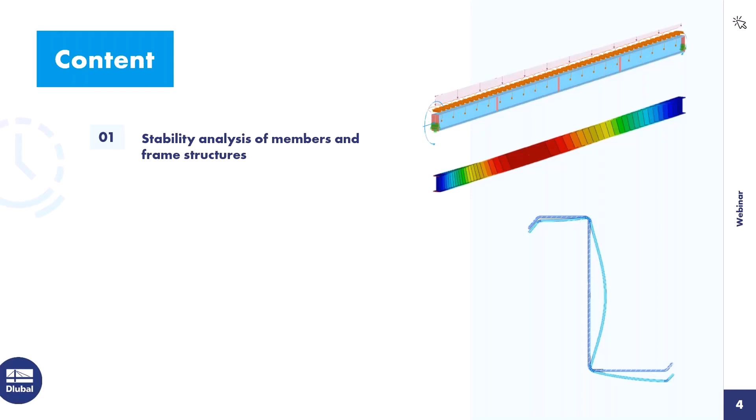Within this webinar, I want to show you the linear stability or bifurcation analysis that we can use in RFEM 6 as a tool to assess structural stability. I want to show you how to use this tool and where it is used internally in the background to assist the design of, for example, steel members. I would like to demonstrate this on some smaller example models that I have mostly prepared before. So we will jump into more or less finished models instead of focusing on the modeling of more complex structures. We will do that maybe next time again.

And the table of content looks like this. So first I want to focus on the stability analysis of members and frame structures. In the second step, I want to go to the stability analysis on a cross-section level using the finite strip method. Then I want to show you how the buckling analysis is integrated in the steel joints add-on. And lastly, I want to show you how we can use the add-on structure stability for troubleshooting of instabilities.

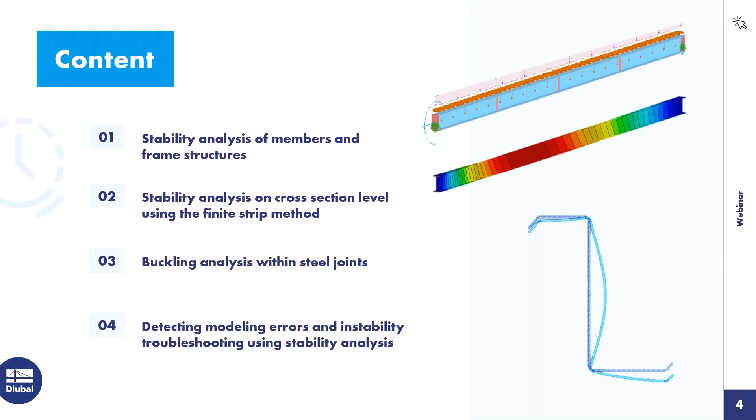I think Andreas missed the point of mentioning that we have a lot to discuss today. I have prepared a bit too much. I realized that when I did the first webinar on Tuesday. So it will roughly take me 90 minutes to go through this. I hope you have enough time. If you don't, then it's no problem. We will, of course, record the presentation, and you can watch the rest then on YouTube on our site. You will find the recording. All right, so apologies for that.

Okay, before we jump into the first model, I want to give you a brief introduction and explain at the very least a few points that are related to the stability analysis and how we perform it in RFEM 6. So what elements or structures are we taking care of with this analysis method? It's usually slender members and structures under compression that tend to become unstable, where the slenderness of a member or a structure is not only defined by its dimensions. The greater the length of a structure or member compared to the cross-sectional dimensions, of course, the more slender and prone to instabilities it is, but it's also related to material properties.

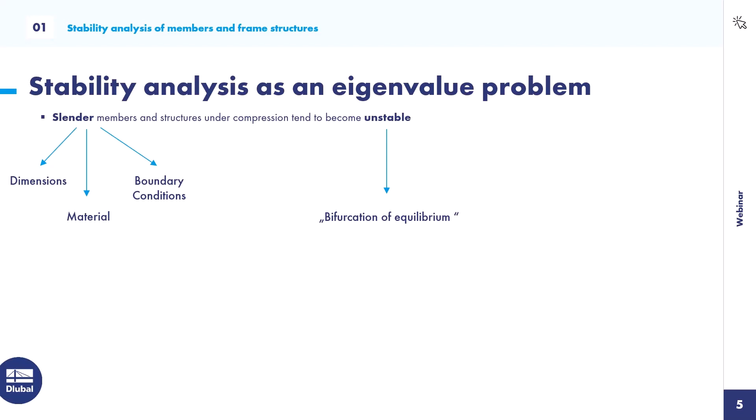So if I have a material that has high strength and low stiffness, then it's more likely that stability failure will be the critical design element as opposed to cross-sectional failure. And then lastly, the boundary conditions, of course, play a major role. If I have rotational restraints or lateral restraints for our member, it's not that likely to become unstable. And what do I mean with unstable? When we reach the unstable state, we have no clear state of equilibrium. We have instead a bifurcation of equilibrium. So there are multiple paths that the structure may follow. And that's why this linear stability analysis is often referred to as a linear bifurcation analysis, or LBA. I might use that abbreviation along this webinar as well. And also the critical load may sometimes be named bifurcation load.

Using the FEM, the ideal bifurcation load can be determined by solving a conventional eigenvalue problem. So we can set that up and solve that. What does ideal mean in that context? It means for the stability analysis that we treat the structure as linear, assuming fully linear structural behavior and a perfect geometry. So the base geometry of our model is used in this stability analysis.

The eigenvalue problem in the general formulation has two symmetric matrices, A and B, the eigenvalues lambda, and the respective eigenvectors x. To solve for the unknown eigenvalues lambda, we set the first term of our formula to 0, which is mostly done by calculating the determinant of this first part in the bracket and setting it to 0. We have multiple numerical tools or solvers to do that.

In our specific case, in the stability analysis, our two symmetric matrices are represented by the linear stiffness matrix and the geometric stiffness matrix. The geometric stiffness matrix is dependent on the loading conditions. That's also why, before we can solve a stability analysis, we need to perform a structural analysis to determine the internal forces in the system and to determine the entries in the geometric stiffness matrix.

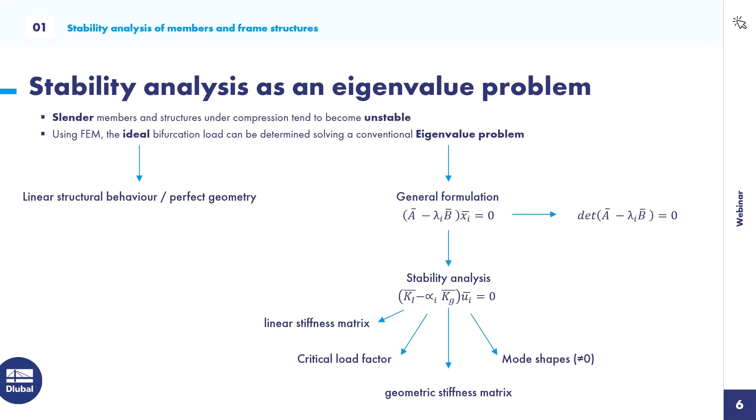I'll try to simulate an Euler case 2 and make a small comparison to see if we can evaluate the correct critical load according to Euler, and what else we can get from this structural stability analysis.

So let's jump into the program. As I said, I have prepared some smaller models for you. The first one is this simple Euler case. I have an HEB 300 beam with a length of 5 meters, and I applied a unit load of 1 kilonewton that sets the member under compression.

In order to perform a stability analysis with our add-on structural stability, I need to first activate it, which I can find in the base data of the model. I activate the respective add-on here, which you can find under analysis add-ons, and click OK.

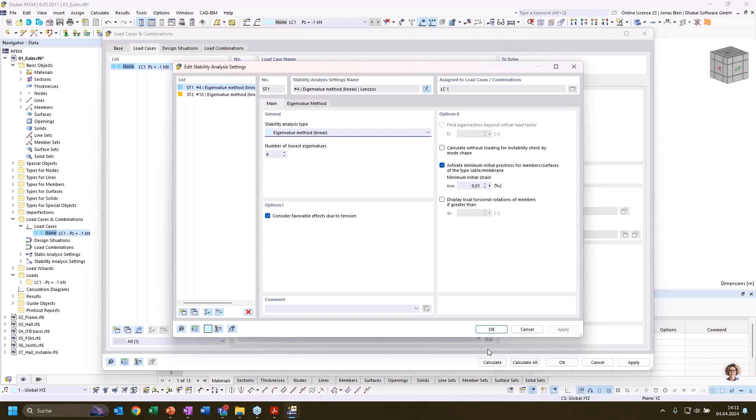4 eigenvalues are enough for our simple case, so I keep this number set here. Then we have multiple solver variants to solve the determinant of our eigenvalue problem, but the default solver should mostly suit us for this problem. There might be cases where you have subsystems that are not connected to each other. Then this default solver will throw an error and suggest another solver variant.

With these default settings, I can just run the load case. Now the first thing the program does is solve the static analysis, and then it solves for the stability analysis. When I have performed the stability analysis, I not only get the results for the static analysis, but I can also switch to the stability analysis results using this drop-down menu here.

Okay, so what do we see here? First of all, we get a drop-down menu in the upper left corner, and in the table we can see that we have these 4 mode shapes calculated with a respective critical load factor. This represents the factor which I can multiply the external load with until my system would collapse due to instability. So if I would increase the unit load of 1 kilonewton up to 7,035 kilonewton and run a second order analysis, my system would become unstable and I would get an error message.

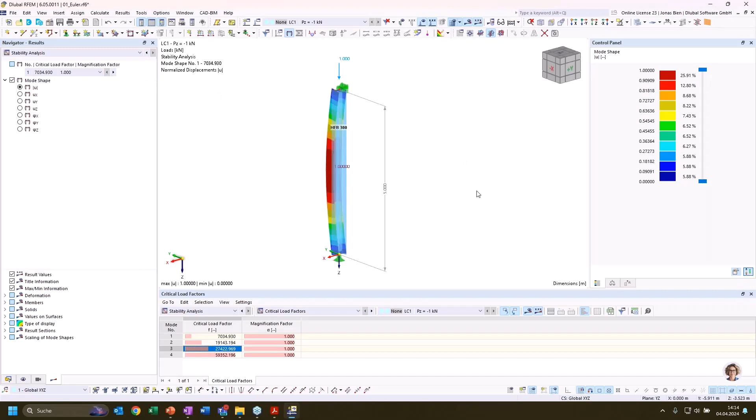So just that you are not confused when you see this parameter in another context. We can go through the 4 eigen modes here by clicking the table entries, or through the drop-down menu. We can see the first eigen mode that is presented to us would resemble buckling of our I-beam around its weak axis, and it's doing that in a symmetric way. We have a simply supported beam here, so that looks as expected. Then the second mode shape would be buckling around the strong axis.

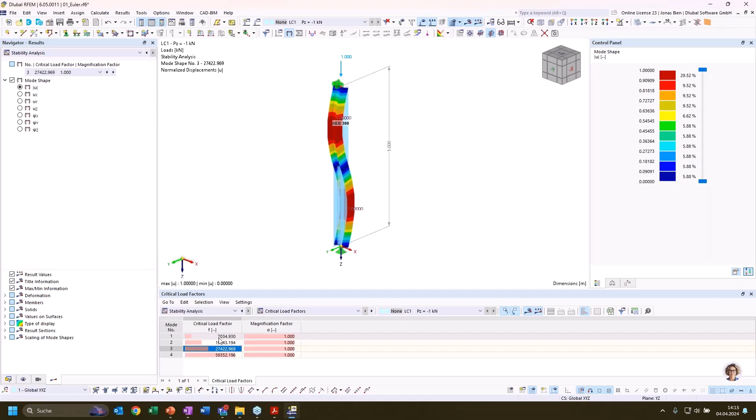The third and fourth eigen modes are some multi-wave eigenmodes for buckling around the weak axis. These are mostly not very interesting for us, so usually only the mode shape with the lowest critical load factor is of interest for us. And I want to now compare the critical load factor that we have calculated here with the critical ideal Euler load that we have for our Euler case 2.

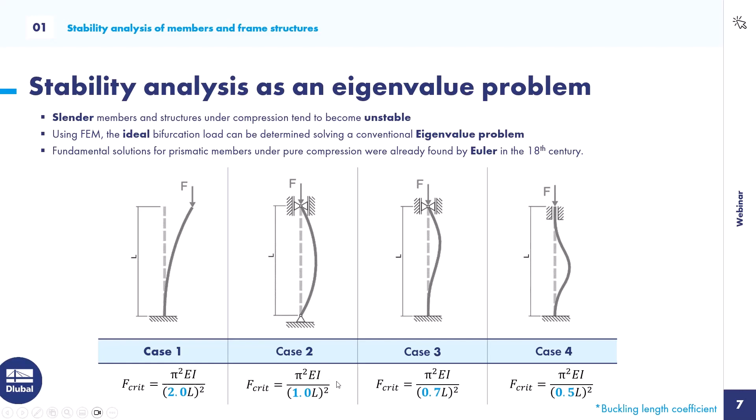Just so that you remember, we could calculate it using this formula: pi to the power of 2 times the Young's modulus times the moment of inertia of our section, divided by the effective buckling length. In this case, it would be the length of our member times 1, to the power of 2. I could do that using my calculator, but then I would need to look up all the values for my section, the member length, the material properties, and so on. So I want to show you an alternative solution.

We can use the in-app console that we can open via the toolbar. In here, I can reference all the objects that I have in my model. For example, I could reference my material number 1 by typing this and then a dot, and I see all the properties that I can ask this object for. For example, I would find the elastic modulus here, and if I press enter, I get the elastic modulus of our material number 1 in SI units.

That's important, and of course I can do some more complex calculations here. I could take this elastic modulus, multiply it with the moment of inertia of my first section. Let's see first what the critical Euler load would be for buckling about the weak axis. That's what mode shape 1 gives us. So I use the moment of inertia for the z-axis here in that expression.

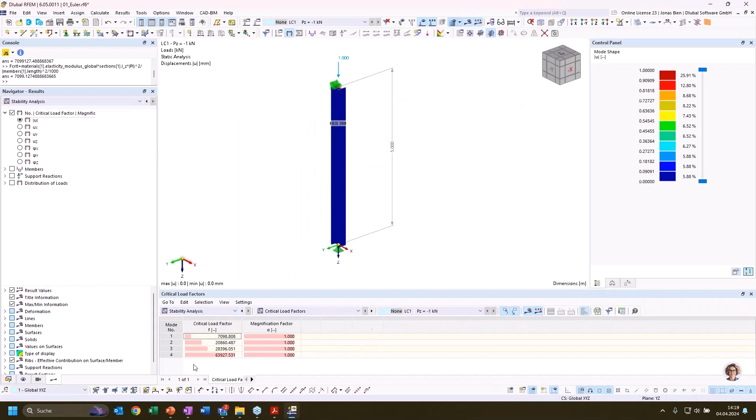So if we want to compare values, we can manually deactivate the shear stiffness for our section in RFEM and do the calculation again, and see what our critical load factor would now be. If I again go to the results, we now see that our critical load factor is much closer to the ideal Euler load.

It compares very, very well.

So we could, of course, also calculate the critical load for buckling around the strong axis. Just we need to swap the Z with a Y value, and we have the moment of inertia about the strong axis, and also this value is quite satisfying if we look with regards to our result that we received from the structural stability add-on. So that compares quite well.

We've, as we expected, met the results of the analytical formula. Okay, now that that's set and we are confident that our solution here provides reasonable values, I want to show you another important result of our stability analysis when it comes to member results.

And we can, because it's often used for the later design of the column, if we, for example, would take a classic approach to design this steel column using an equivalent member method, we would need effective buckling length. And we can use the structural stability add-on to calculate the effective buckling length for this equivalent member method.

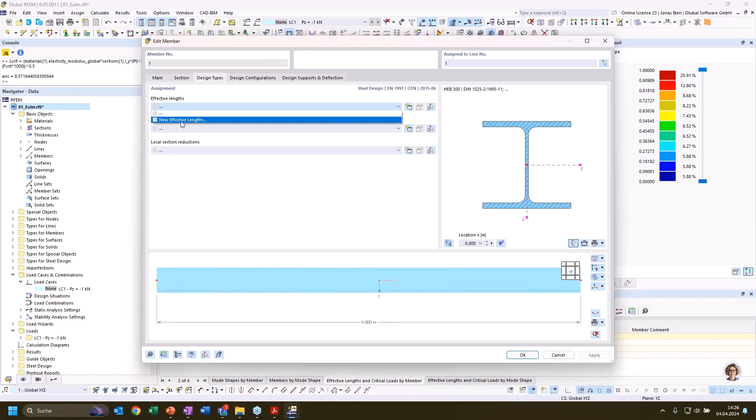One thing I want to show: we can directly import these buckling lengths into our design add-on. So if I want to design this column here with our steel design add-on using the equivalent member method, I have to assign these effective lengths.

Here I have the option to import the buckling length from the stability analysis. If I click this, we get another tab where I can enter the load case, the mode shape, and the member number. Now it would take this buckling length coefficient from mode number 1 for beam number 1 and evaluate the effective buckling factor to use for the design.

In this case, we have to take care that buckling around the strong axis happens in mode number 2, so it is observed in mode shape number 2. So we would need to enter mode shape number 2 here, and mode shape number 1 would be for the buckling length coefficient for buckling around the weak axis. That would fit and suit our expectations.

Of course, we can do that for more complex systems as well. We just need to keep in mind that when we have a more complex system and change something, the order of the mode shapes can also change. They are always sorted for the lowest eigenvalue or lowest critical load factor, so the mode shape with the lowest critical load factor is always mode number 1.

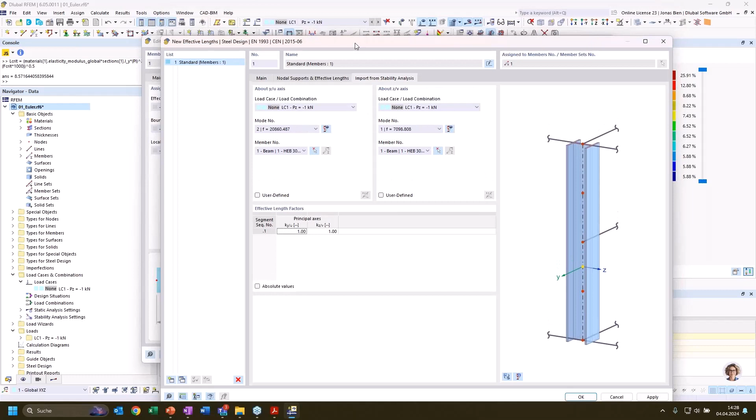If we change something in our system, it can happen that this sorting changes, but these entries then need to be checked again because they are not smart enough to adapt to the changed model. So we would do that manually. Sometimes it's just better to do the stability analysis and then manually put in the buckling length coefficients, so we don't need to make any thoughts about it anymore.

All right, but that's not what I want to focus on now. I want to show you instead how the buckling length coefficients adapt when I adjust the statical system. So when I, for example, take a rigid boundary condition at the member at the bottom of this column, it should calculate a lower buckling length coefficient because now the system resembles Euler case number 3.

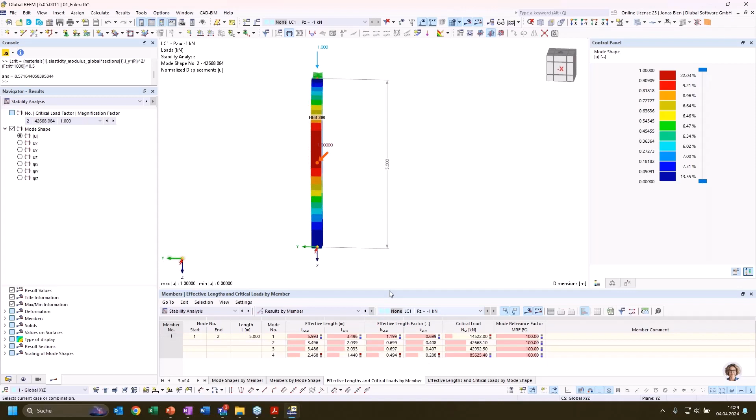We know that here we would expect a buckling length coefficient of 0.7. And that's exactly what we get for the first mode shape for the weak axis and the second mode shape for the strong axis in this case.

We also need to take into consideration that for these cases, why should I use my add-on here? Because these cases are known, I can just apply the Euler formula and calculate my buckling length. But what if we have something like a spring stiffness, a certain stiffness somewhere between Euler case number 2 and Euler case number 3?

Here it's not so obvious what the buckling length for our equivalent member check would be. Of course, we could look into textbooks that have these cases covered, but we can also use the structural stability analysis to evaluate the effective buckling length factor here. As we expected, it is between 1 and 0.7.

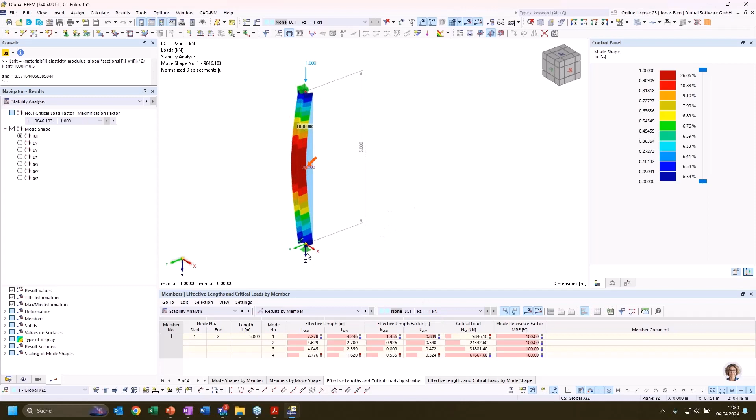So everything's set. Because it's a linear analysis, it is interesting what the program does with nonlinearities. So, for example, if I apply some kind of nonlinear boundary conditions here, which at first glance don't look that nonlinear...

In this case I want to apply a stiffness diagram where I have the stiffness of our spring at the column bottom in relation to the vertical load, but as you can see, it should be constant—no matter what the vertical load in the column is, the spring constant should always be constant. So it doesn't look nonlinear at first glance, but we have to take into consideration that all these nonlinearities are ignored in the structural stability analysis. I want to just demonstrate this.

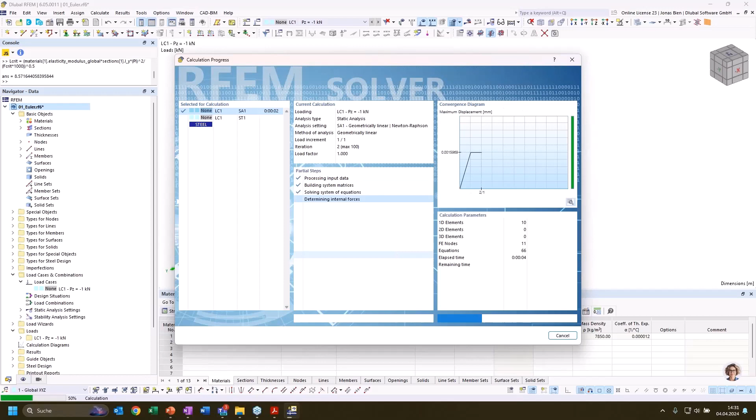So although we have set this nonlinear spring stiffness at the bottom, as a result we get Euler case 2, where a pure hinge is assumed at the bottom. So when it comes to the supports, only these entries are taken into consideration for the structural stability analysis.

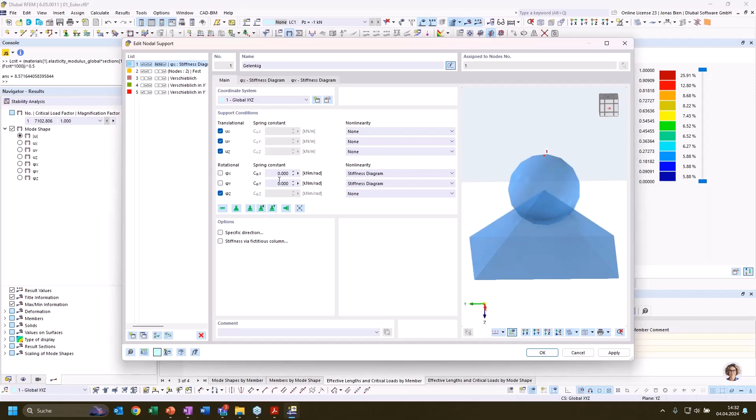Of course, when we are working with other nonlinear elements such as tension rods or buckling members, these are taken into consideration or not according to their state in the static analysis. So if we have a tension member that is under tension, it will be taken into consideration in the structural stability analysis as well, and vice versa.

Okay, then one last thing to finish this simple example here: let's delete this nonlinearity and see what happens if we divide this member in half.

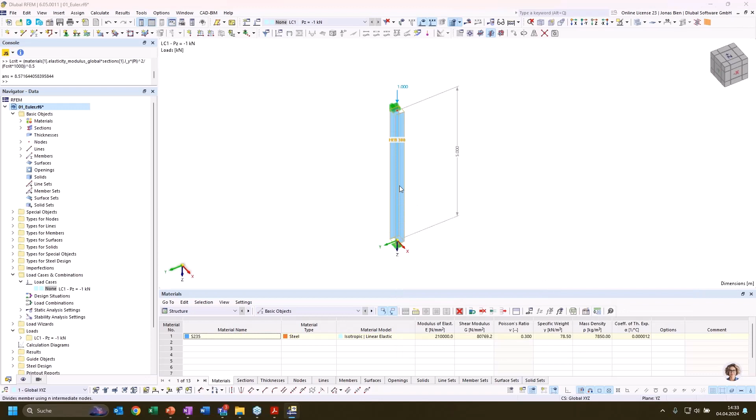I just introduce an intermediate node and divide this one column into two separate members, and again run the structural stability analysis.

What does it do with the buckling length? Is it still valid, or does it give me some weird results? Let's see. The critical load factor is still the one, or is the same as if we wouldn't have divided this column.

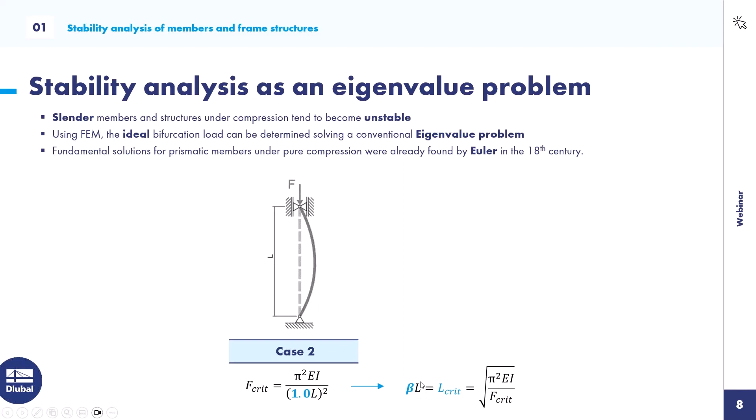And now the buckling length, or to dock it again, the effective length of our members is also the same. So now we have two members, but the effective length for each member is still 5 meters, and that's what is expected when we again look at the formula for the calculation of our critical buckling length, because the Young's modulus, or the moment of inertia, they have not changed, and also the critical load factor has not changed. The only thing that changed is our reference length L for the member. It's divided into half, and that is then only visible in the buckling length coefficient, which is now 2 instead of 1 for each of the members.

So we could still use this effective length factor for the stability design within steel design, or some design add-on. It would still be valid.

Okay, now let's jump into, or increase the complexity a bit. So what if we have more than one member in our model?

In this case, we have a 2D model of a 2-hinged frame with an additional column number 5, that is just connected to this 2-hinged frame by a truss member. This is basically a simply supported column, just as we have seen it before, which leans toward this 2-hinged frame here, or is supported by the 2-hinged frame at the column head. All 3 columns, so member number 1, 3, and 5, are loaded with a load of 1000 kilonewton in compression.

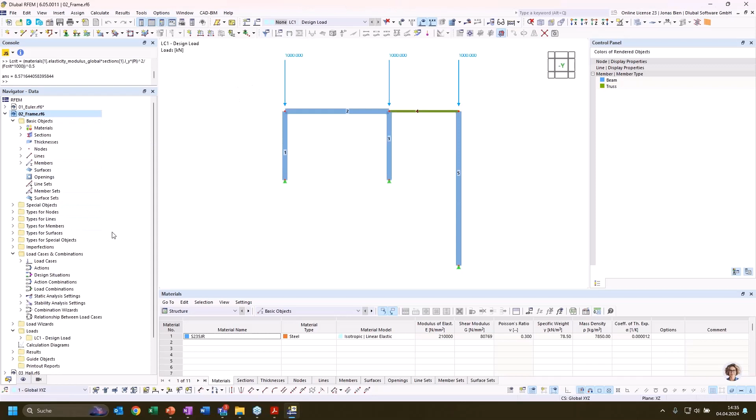And now let's perform a stability analysis for this load case as well. It should be all set for this analysis, so same settings as we have used them before for the Euler case. And accordingly, we also get 4 mode shapes for our structure.

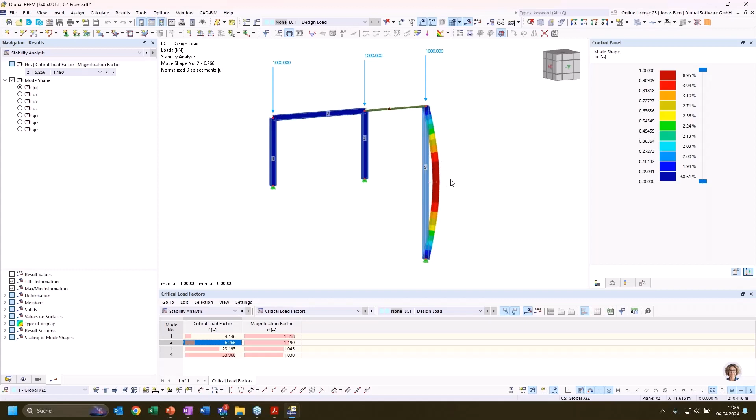I want to quickly browse through these mode shapes together with you. So the first one is some asymmetric lateral deformation of the 2-hinged frame, and also this connected pinned column is also moving with the 2-hinged frame. Then the second mode shape would represent buckling of the longer column with the pin supports around the strong axis. The rest of the structure does not seem to have any deformation.

And the third would also be a higher mode of this pinned member number 5. And mode shape number 4 would resemble a symmetric buckling mode of the 2-hinged frames without any participation of the simply supported column here at the side.

So if we want to now extract the effective length, for example, for the columns here of the 2-hinged frame, we can again go to the member results of the stability analysis and check the effective length by member, and I can then click on one of those members, and I will automatically be routed to the respective table entries.

And now in the first mode shape, as we have seen, this 2-hinged frame suffers from buckling around the strong axis, and we could read the effective length factor accordingly for the strong axis in this column right here. So we would get an effective buckling factor of 2.8, which is also in the realm of the expected results for such 2-hinged frames.

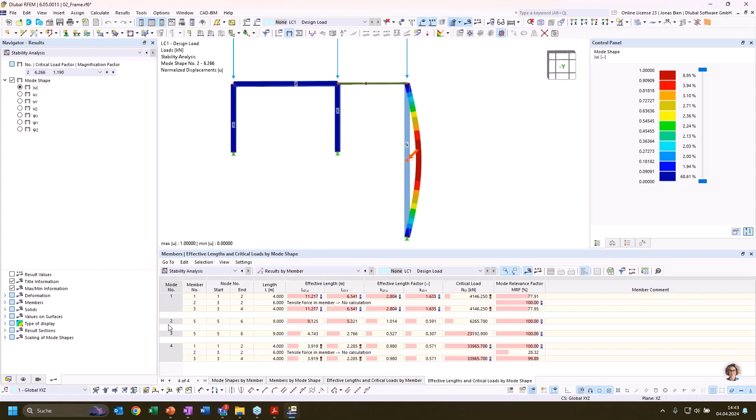We can, of course, also use the filter function to make our lives a bit easier when browsing through this. For example, we could say we are only interested in members that have a mode relevance factor greater than 20%. And if we do so and go through the mode shapes, for mode number 2 we have only one entry, which should be a localized stability phenomenon and not so much related to a structural failure of the whole structure or substructure of the model.

That way we can use the mode relevance factor to somehow filter mode shapes for our purpose, for example, for the determination of effective length factors.

Because here I would go the other way around. When I'm interested in the relevant buckling factor for column number 1, I would go through the modes I have calculated and only take into consideration the mode shapes that have a mode relevance factor that is significant, and read my buckling length factor from the mode that has the lowest critical load factor. In that case, I would definitely take the value of 2.8 for column number 1 and also for column number 3.

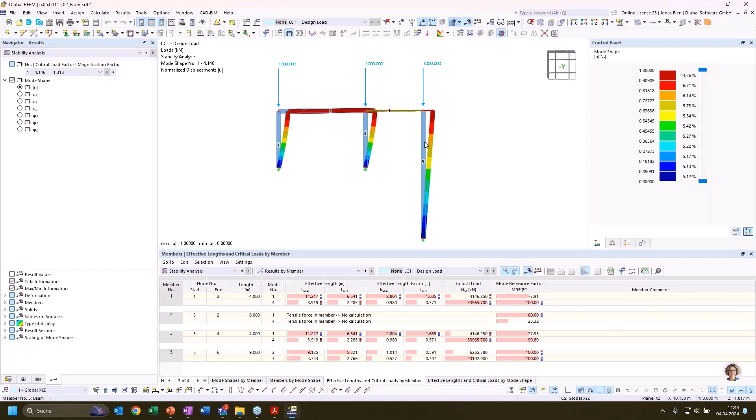All right, but I want to show you in the next step how we could also leverage this tool in a more realistic setting, or how to approach the buckling length determination in a more realistic model.

So here we have an industrial hall. We have a lot of different load cases here that, of course, would give us some, I don't know, probably about 100 or 200 load combinations. Of course, in some applications, we can have a lot more load combinations.

And then the question is which load combination, or the first question for our buckling length determination, is which load combination is most severe for buckling for a specific member.

I have now, for this case, deliberately started with result combinations, because sometimes, for example, when I want to design bridges, I may have 10,000 load combinations, and it's not possible to calculate all 10,000 load combinations and assess them for stability. So what I would recommend, if you have too many result combinations to handle in one model, of course here it would still be feasible and no problem, but if you have additional load cases, that can be a problem.

I would, in the first step, calculate my combinations with result combinations to get the envelope of results. I need to calculate the design situation where the complete envelope of all result combinations is given. Then, for example, when I want to design the columns for buckling, I would look into the internal forces in this envelope solution and look for the most critical ones for buckling, which of course would be the combinations that give the highest compressive load in the columns.

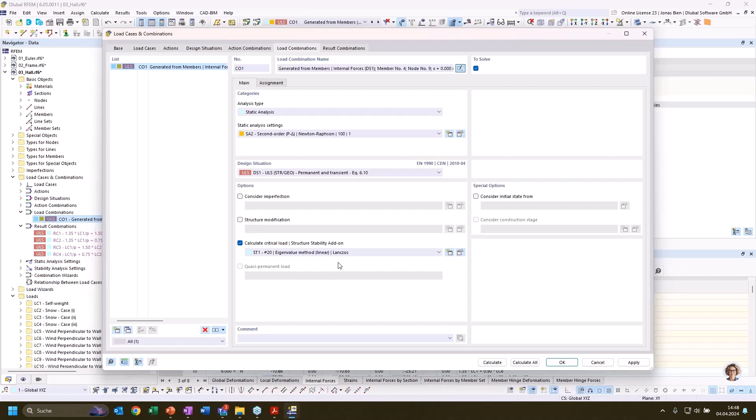Now from the result combination, I can just by right-clicking this combination, generate a load combination just from this table. For this load combination, where I have the feeling it could be the most relevant for buckling of our columns, I can now perform an eigenvalue analysis, a linear stability analysis, by just activating it here and calculating it. So now I specifically run the stability analysis for just this one load combination that I've generated from the envelope.

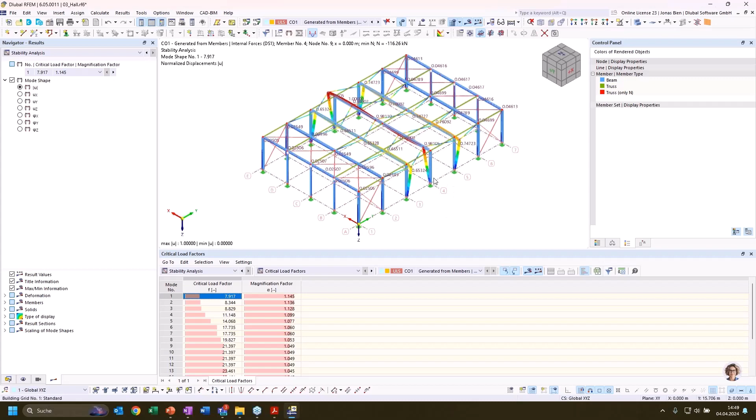Now the second question, after sorting which design situation could be relevant, I would have to figure out, for this column, which mode shape is the most relevant for determining my buckling length. So again, as before, I have 20 critical load factors and mode shapes, and I can browse through them. I see some involve deformation or buckling of the frame where this column is involved. Some are only isolated buckling of those columns, or some compressive member in the roof, so these wouldn't really interest me. In order to filter these out, I can again use the mode relevance factor.

So I just go to the table effective lengths and critical loads by member, click on my member number 4, and get the whole table here. I get the mode relevance factor for all 20 mode shapes I've calculated, and I see that only in 2 of these mode shapes is my column member really participating. So these would be the only 2 mode shapes suitable for extracting the buckling length.

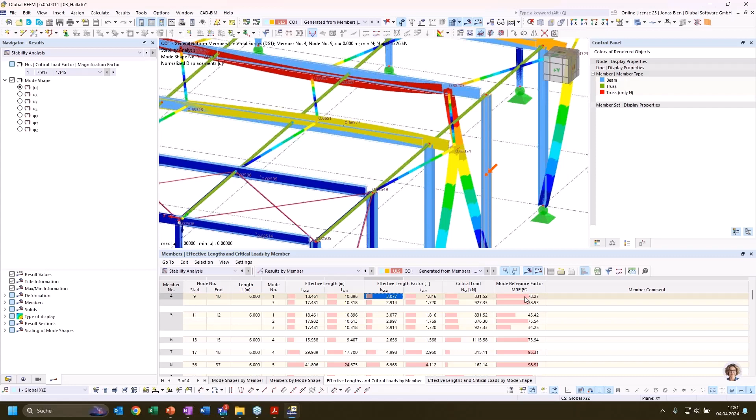I could of course apply the filter to make it more accessible. Then I would again follow the rule from the last smaller example: take the mode that has the lowest critical load with a significant mode relevance factor, and take the effective length factor for buckling around the strong axis from this mode shape. So this is how the mode relevance factor can help you assess the relevant mode shapes for a particular member design.

Yeah, that's what I wanted to show you on this model. Now I want to take the next step and highlight something you may have noticed so far. We have only discussed the flexural buckling of members, but especially in steel structures, other stability modes can also govern the stability design, namely torsional buckling or lateral torsional buckling. We can also investigate those stability modes with our structural stability add-on, but we need to activate warping torsion in order to detect those stability modes.

I want to make another small example where we investigate the lateral torsional buckling of a simple system, where again, as in the first Euler case, we know the exact solution. I want in the first step to compare the values we get from RFEM with the analytical value. So in order to perform a structural stability analysis where we can also consider lateral torsional buckling, we would, in addition to the structural stability add-on, also require the torsional warping add-on.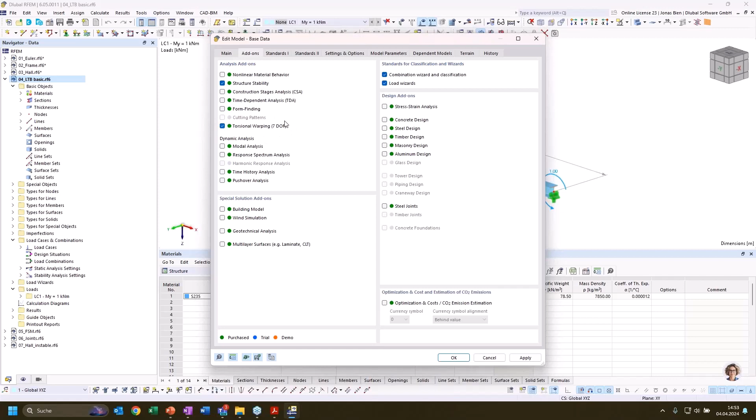And as soon as we activate the 7th degree of freedom, this would be directly included in the stability analysis, or would be taken into account. And I have now for this simply supported member here, it's an HEB 300 again, with a length of 10 meters and a constant bending moment.

I could again run the stability analysis, and now we are not only getting modes for flexural buckling, or we wouldn't get any flexural buckling modes for this member at all because we have no compression in it, but I didn't activate the structural stability analysis for this particular load case, so I will just do that. And now we should get a lateral torsional buckling mode.

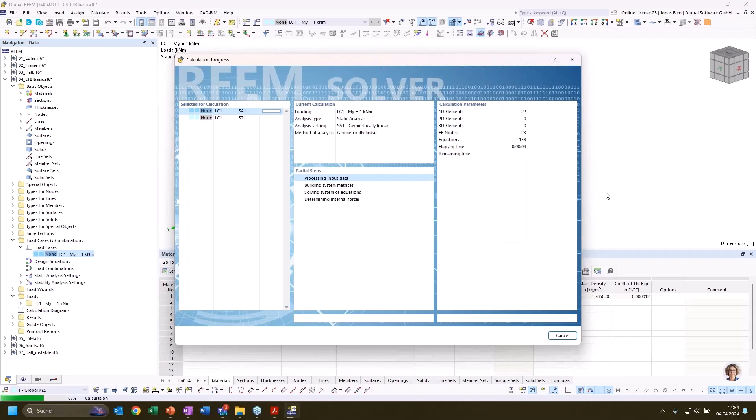When we switch to the results of the stability analysis, we can now see very clearly this characteristic deformation of our member. It tilts and at the same time moves in the direction of the weak axis. And again, we get a critical load factor, and this one we can compare with the analytical solution. For this simple system, an analytical solution can be easily found in the textbooks. It was once also implemented or written down in some of the codes.

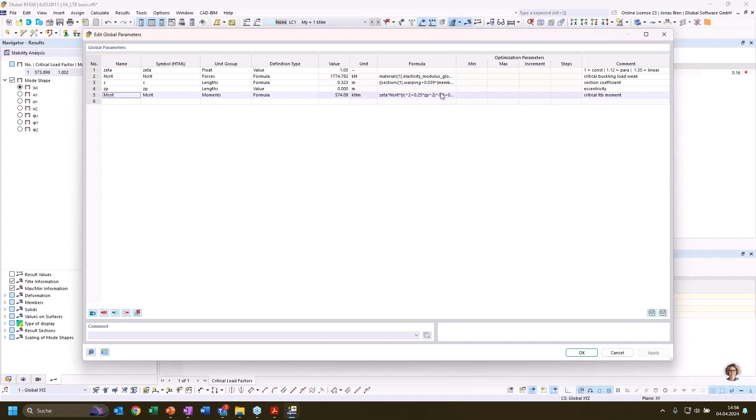For example, in the old German steel construction norm or code DIN 18800. I think in some national annexes of the Eurocode 3, this formula is also given. But for our convenience, I already plugged this formula to calculate the critical bending moment for lateral torsional buckling into our global parameters. So that's another thing I can do instead of just using the console and typing in my commands to evaluate certain parameters or values. I can also use global formulas, global parameters, to calculate something. For example, I have now created a formula for the evaluation of mcrit, and we can look at what goes into it. Maybe this looks somehow familiar to you.

So here we have a value or a parameter that describes the moment distribution, which is zeta. It's 1 in this case for this simple case with uniform bending. Then we have the elastic buckling load, ncrit. That's the one that we already assessed in the first example. Then we have some parameter C that takes into account the warping and torsional stiffness of our section. And we have the ZP, which resembles the eccentricity of the loading, which is in this case not important. And what we get from this formula is a critical bending moment of 574 kilonewton meter.

We could also use the console again to evaluate this. So all the global parameters that we have stored, we can call them here in our console. And in this case, it's again written in SI units, so I would need to divide it by 1000 to get to kilonewton meter. And this is very close to the value that we evaluated here with the structure stability add-on. So it works again quite well.

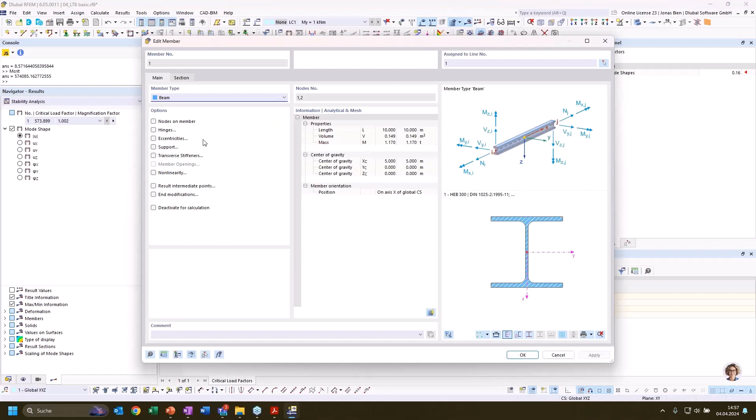But of course, as in the Euler case, we can use our structure stability add-on to investigate much more complex cases. For example, we could add member support. So I go to the member and add a support, and then I get this tab here where I can enter a member support. I could manually put in some rotational restraint. I could even apply an eccentricity of this member restraint. For example, I could say I have a rotational restraint at the top of the flange.

And we can now also in the global analysis take into consideration shear panels and rotational restraints. So these are entered as fictitious stiffness. And you may know them from steel design or aluminium design or timber design, where you always had access to those restraints, and they were only considered in the design of the member, so in the design add-on. But we can now use them in the global structural stability analysis as well.

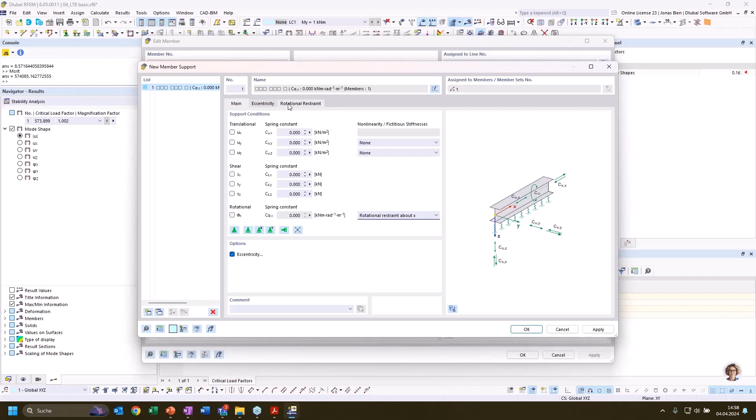So I could, for example, define a rotational restraint. For example, I want to consider some kind of sheeting that I have on top of my girder. I will now just take some random settings, more or less. I take some sheeting just to get some stiffness. Of course, these values were accessible all the time, but now we can, as I said, also leverage the stiffness that we define here in this global structural analysis. And one thing that is also new, and I want to highlight to you, is that for the spring stiffness of the connection between the trapezoidal sheeting and our member, and also for the load introduced to the sheeting, we can now set load dependent values.

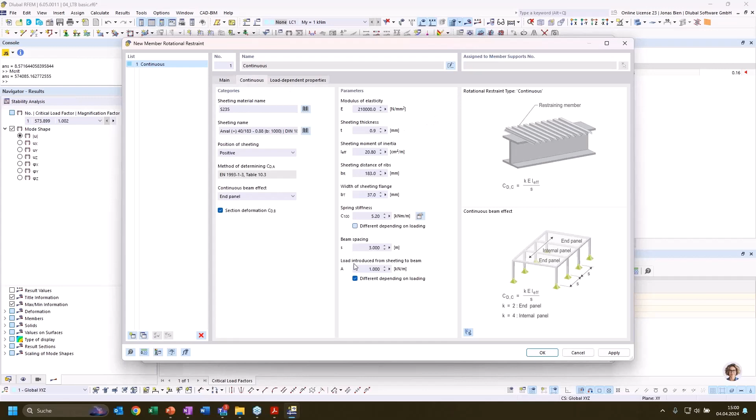If we click these options, we could, if we had multiple load combinations to investigate, set different values for different load combinations, for example, distinguishing between situations where we have suction on the roof and compression or pressure on the trapezoidal sheeting. We could take this into account by adding different values in the table. This is also quite new, since a few months.

With this rotational restraint, I could also add a shear panel. By the way, we are now able to not only add a shear panel in the Y direction, but also in the Z direction, which could be interesting for columns that are also girders rotated by 90 degrees. We can use that now since some weeks.

We have now calculated directly some stiffness for the rotational restraint from our trapezoidal sheeting, and we could consider this in the stability analysis to take it into account. By default, these fictitious stiffnesses, the trapezoidal sheeting in this case, would only be accounted for in the design add-on.

If we activate the steel design add-on, in this case because we have a steel girder, and I now activate the lateral torsional buckling check according to the equivalent member method, we see the default way of calculating the critical moment value is using the eigenvalue method, the same method we use in the structural stability add-on. Of course we need to set some boundary conditions for the design add-on, but in our case it's simple: we have simple support with fork supports, and that's what the default settings are also for the effective length settings. So that should be all right.

In order to perform the steel design, we also need a design situation and a load combination inside this design situation. I will just add a load combination with 1 times the first load case. And if we now do the calculation, we're running a static analysis, then the structural stability analysis of this member, and then the steel design analysis.

Let's check the results and compare them. First, in the stability analysis, it seems like nothing has changed. We still have a critical bending moment of 574 kilonewton meter. But in the design add-on, let's check the result here. We have now the check for lateral torsional buckling.

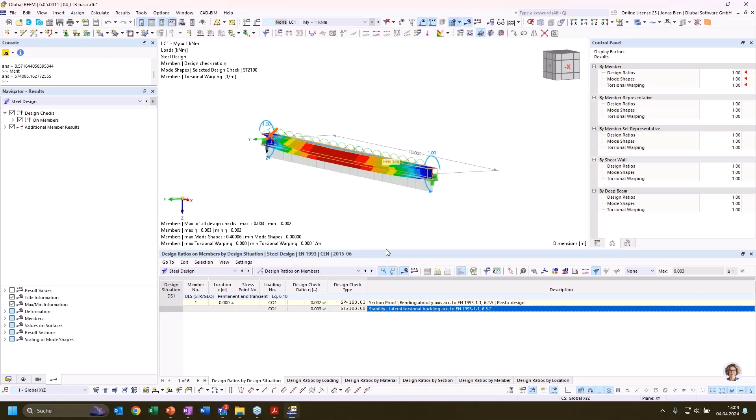We can also see what the relevant mode shape would look like if we click on design details. If we double click on the design details, we can check what value for mcrit is evaluated in the internal eigenvalue analysis. We see that now in the steel design add-on, the rotational restraint on top seems to already be taken into consideration, because we have a much higher critical moment there, while in the structural stability analysis the values stayed more or less the same.

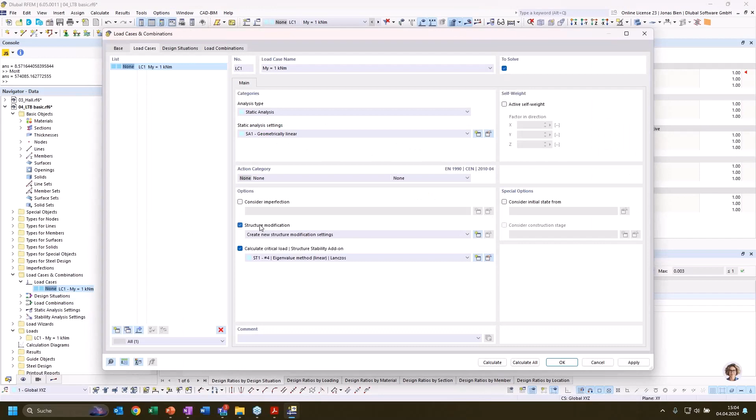But we now have the option to take these fixture stiffnesses into account also in the structural stability and static analysis, by adding a structure modification to this load case. Here we just need to activate the option to consider shear panels and rotational restraints also in static, stability, and modal analysis. Before, it was only possible to take these shear panels and rotational restraints into account in the design, in the LTB design within the design add-ons.

But now we also moved this possibility to the global analysis, because you may want to perform a lateral torsional check, like using a second order theory analysis with imperfections, and you may also want these rotational restraints to be effective in this global analysis. That's why we added this option through the structural modification.

What is also new is that you find these objects, the member shear panels and the rotational restraints, now under types for members and not anymore under the types for the design add-on. In earlier releases, we had those two objects under, for example, the types for steel design or aluminium design or timber design. Now you find them under general objects for types of members.

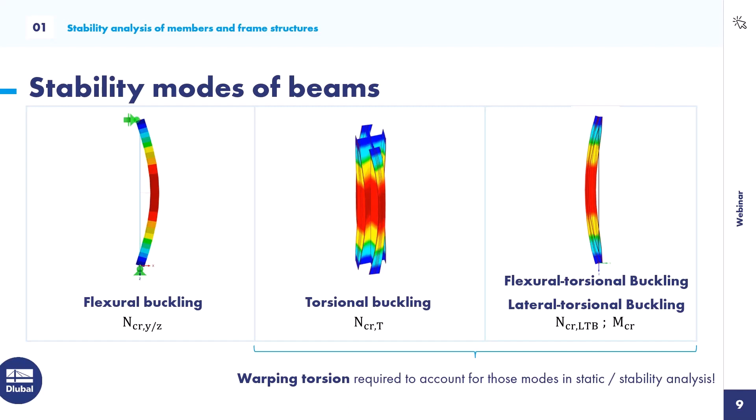If we're interested in local buckling of the cross section, we could extract from these beam models a shell model. That's quite easy in our software - you can just right click on a beam member and say you want to generate a surface model from it, and surfaces are directly generated with the correct thicknesses, just as they had for the member. For example, the top flange would already have a thickness of 19 millimeters corresponding to the HEB section. Then we could mesh this very finely to do stability analysis for this shell model.

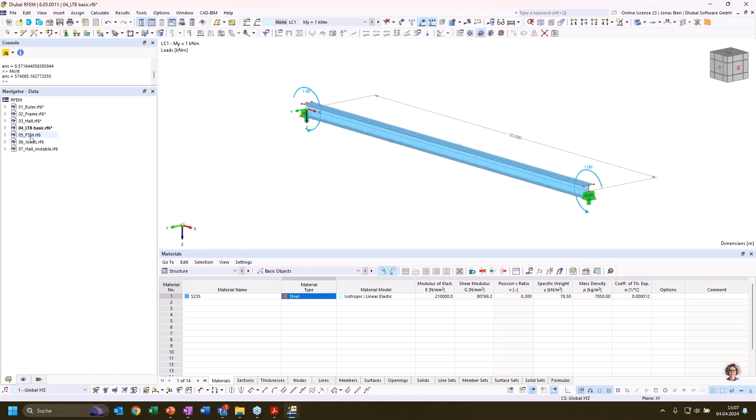By doing so, we could also analyze local buckling modes of the section. Since it's not very interesting to do this with a hot rolled section that isn't susceptible to those local failure modes, I want to do it with a cold formed thin walled section. So here I have prepared a fifth model with a parametric C section with a height of 200 millimeters, width of 75, and a wall thickness of 2 millimeters - a perfect example of a thin-walled, cold-formed section.

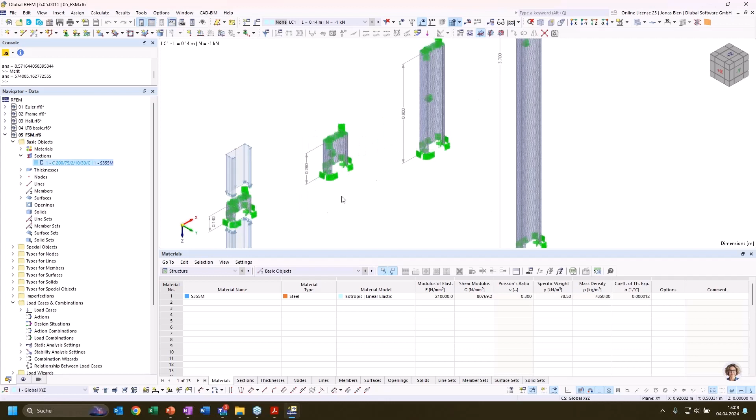As I just showed you, I transferred my beam model into a shell model and meshed it very finely to get all the relevant local buckling modes. Then I modeled 4 different members with different lengths: a very short element of this C section, one with double that length, one with a length of 90 centimeters, and a very long C member as a shell model.

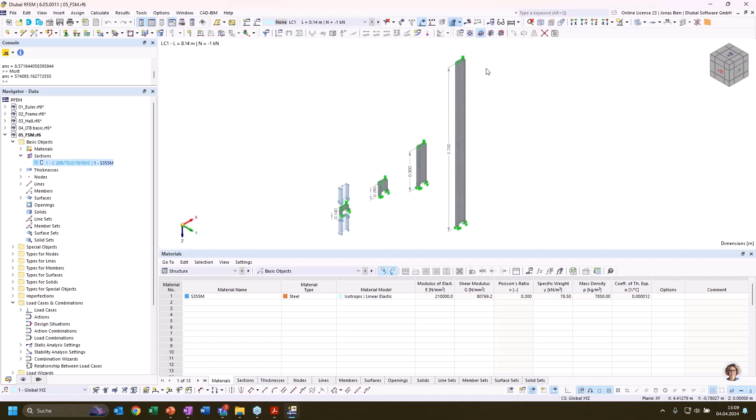I applied some boundary conditions to avoid any unwanted singularities in the model, then applied in 4 different load cases a unity load to the top and bottom of these column stubs. As in the first step, that should resemble the Euler case - a beam with a certain length with uniform pressure applied. But in this case I have a monosymmetric cross section which is very thin. Let's check out the results - what do we get from such a stability analysis?

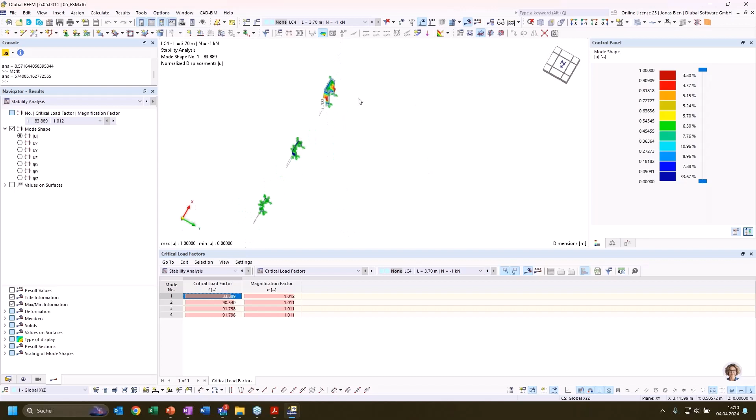Now I have performed a stability analysis of the shell model. If we look at the results for the longest segment, this 3.7 meter long C section, I have the first critical load factor at 84 kilonewtons, and the mode shape resembles flexural torsional buckling. So in this case I don't see local buckling of the different cross-sectional elements, but the whole section deforming at midspan.

If I check the second mode shape, I have buckling about the weak axis. The third mode shape involves local buckling of the web, and this we can only see with such a refined shell model.

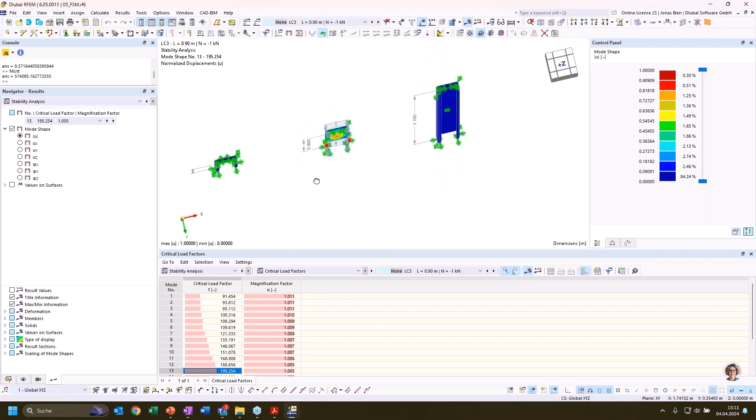Now what happens if we take a shorter column? We see that the critical load factor and mode shape are governed by local buckling. So in this case, global buckling like flexural torsional buckling or flexural buckling wouldn't be the major issue, but stability failure would be more related to local buckling of the web. I can go through this and find several mode shapes where especially the web buckles in different configurations, and then in mode shape number 13, I find a mode shape particularly interesting for cold-formed members, which is distortional buckling.

In this case, it's not separate elements of the cross-section deforming, but the whole cross-section bending, so to say. If we look at the midsection, the lips are deforming horizontally, and at the same time the web is also deforming. For the very short configurations, I again find local buckling modes. What's also important to note is that the critical load factor is not changing significantly - we're always around a factor of 90 when comparing the smaller column segments.

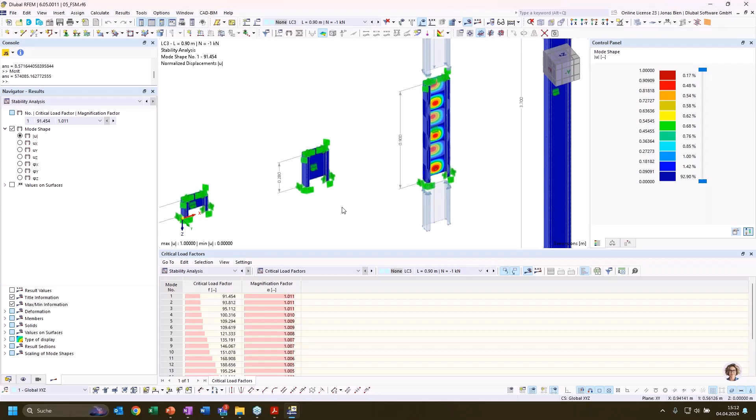But this type of analysis comes with a drawback - it's quite cumbersome to prepare this kind of model. We require quite a fine mesh to get valuable results, and calculation in this case would take 1 or 2 minutes for these 4 cases, because there are quite a lot of elements and degrees of freedom to solve.

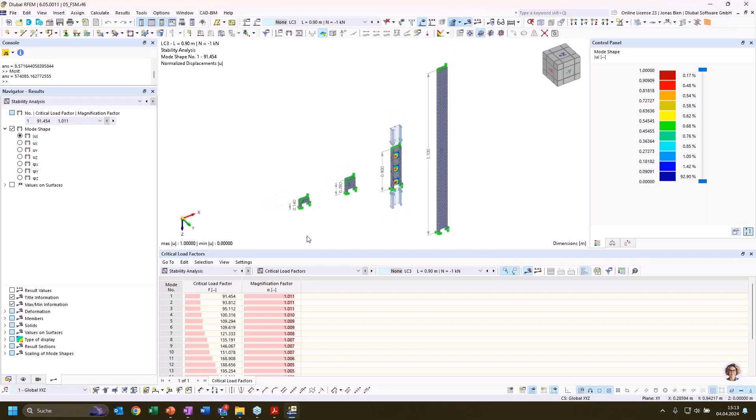But we have another alternative option to investigate such failure or local instability modes on the cross-section level, and this is kind of hidden in the edit sections dialog. That's why I want to show you that and highlight that we have this feature.

For a particular section, we have on the right side this preview of the section with all the dimensions. Below that, we have a drop-down menu where we can find a lot of interesting features and functions of this cross-section, for example unit stresses under certain loads.

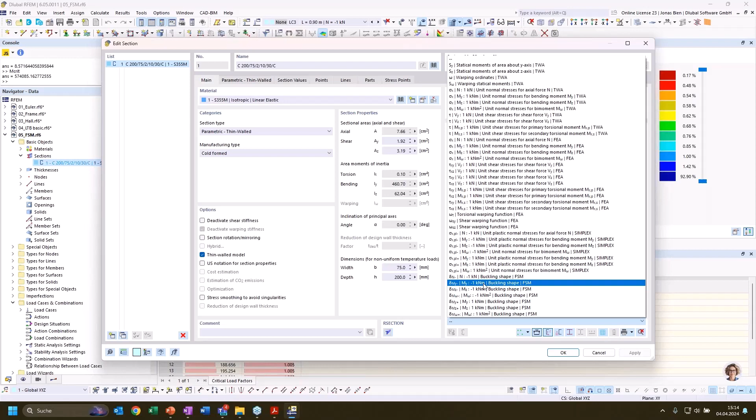But right at the bottom, we also have the possibility to investigate the buckling shape of this section for some unit loads, for example for a 1 kilonewton compressive load or for 1 kilonewton meter bending moment around the strong axis and so on. And if we click on that option, I get a diagram as a result.

What I get here is the so-called signature curve for our cross-section. It gives the relationship between the critical bifurcation factor for this unit load, 1 kilonewton compression, in relation to the member length. So we can see that in the start, we have a very low member or small member length.

In this case, for example, the first minimum is evaluated for a member length of 14 centimeters, which would be the smallest column stub that we have just investigated with our shell model. And when we look at the respective bifurcation factor, we see that it's around 90, which does very well correspond to the linear bifurcation load that we have received from the stability analysis on the global level in the shell model.

On the right side, we can also see how the cross-section deformation would look like in this particular mode shape. And we can go along this signature curve and investigate the different mode shapes that would be critical for a certain buckling length.

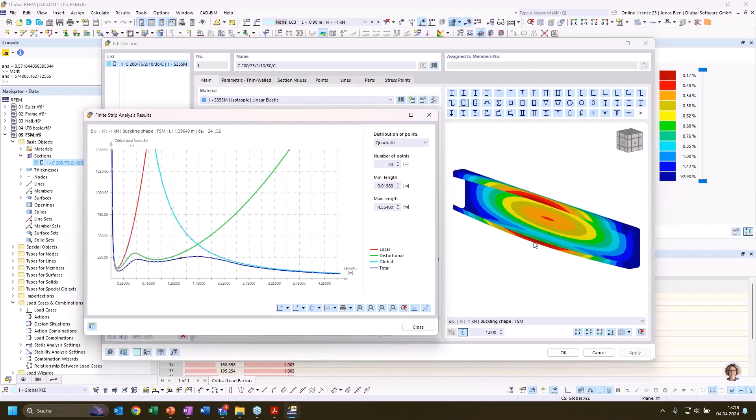And what happens in the background? As soon as I start this feature here, in the background, the finite strip method is employed, and I want to show you what that means.

As we have now already discussed, we can do stability analysis of beams, which has the advantage that we have very few degrees of freedom. Or we could also investigate stability of members with our shell model, but here we have a lot of degrees of freedom, and solution takes quite a while.

The finite strip method is some kind of intermediate accuracy solution where we divide the cross-section into multiple strips, and only one strip or element is used over the length of this member. And when we activate the finite strip method in the edit section dialog, a lot of these FSM members are generated, and the eigenvalue analysis is performed, and the eigen shape is stored, and also the critical bifurcation load is stored.

And this happens on the go. So if we click it in the edit section dialog, it's done, and it finishes for like 50 analyses within less than 1 second. So this is quite a nice advantage of this analysis method.

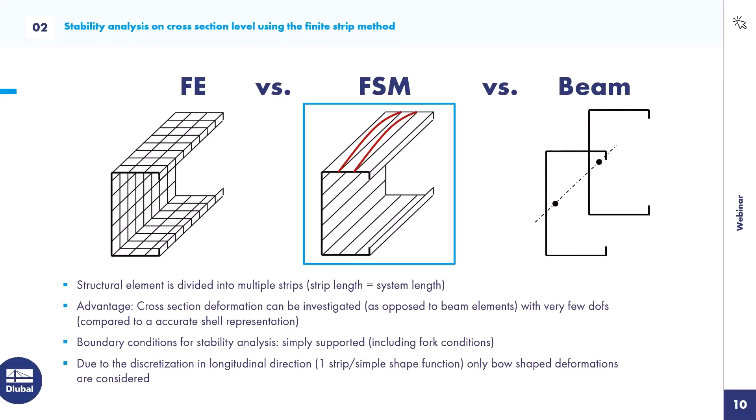One drawback, though, compared with the shell element, is that we can only investigate specific boundary conditions at the moment. So the results are only valid for a simply supported beam that is assumed in the background.

We can only assess results for unit loads at the moment, and we cannot account for any local load introduction. Also, we assume that the behavior over the length of the member and the loading conditions are constant. And because we only use one strip over the length of this element to represent this member, we can only investigate failure modes or eigenmodes that are bow-shaped, with only one half-wave deformation.

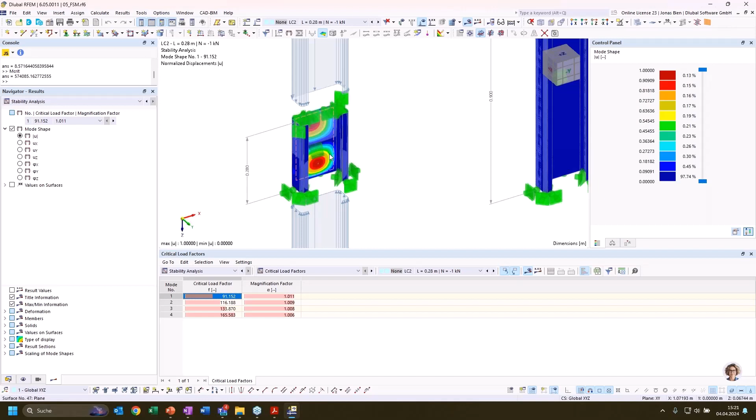But as we have seen in our shell model, there can be, for our second model here with a length of 28 centimeters, also local buckling as a decisive failure mode, and we have two buckles over the length of the section.

This cannot be represented or investigated with the finite strip method as we have it implemented into our program. That's why we should keep in mind that we not only have one curve for this local buckling with the bow-shaped deformation, but also a similar curve that has its limit or minimum at a multiple of the first critical member length. Here, the first critical member length was 14 centimeters, but at 28 centimeters, we have a similar bifurcation load, just with multi-wave local buckling in the web.

And we have multiple of these curves, so we should take the minimum bifurcation load for local buckling or distortional buckling as a straight line in this diagram. If we compare this with the signature curve, we get a feeling for at what member length global buckling gets relevant again before we have local

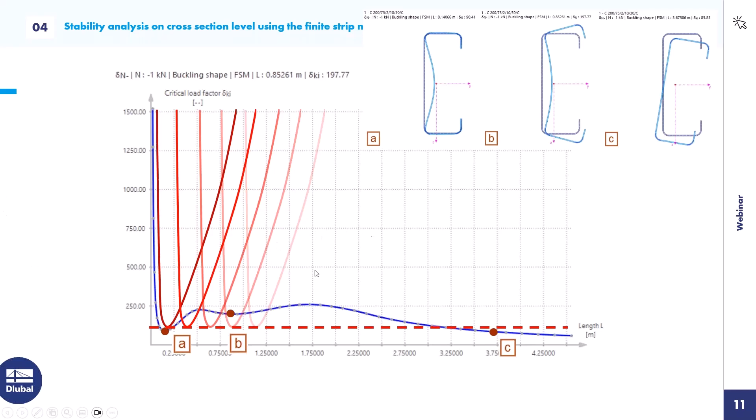stability failure. This is not only a nice tool to get a feeling for which stability phenomenon can be an issue for my cross section. Depending on the member length that I'm modeling, it could be that I can directly see, okay, local buckling is not a big deal, and distortional buckling is not interesting for me. I'm in a realm where global buckling will govern the design.

Or I could also say, okay, I'm at a length where local buckling and global buckling could happen at the same time, and I need to take into account some kind of interaction between these stability modes.

And it also has a practical use. For cold-formed design within our steel design add-on, we use the distortional buckling curve evaluated on the basis of this finite strip method to evaluate the effective sections of our cold-formed section. So we directly use this minima, the second minima of this distortional buckling curve, in the design of cold-formed members according to Eurocode 3 part 1.3, and also for cold-formed design according to the American standard, the direct strength method. So it has a practical use and is already implemented in the cold-formed steel design.

All right, that's it for the second topic, the cross-sectional design. The two last topics will hopefully not take that much time to explain.

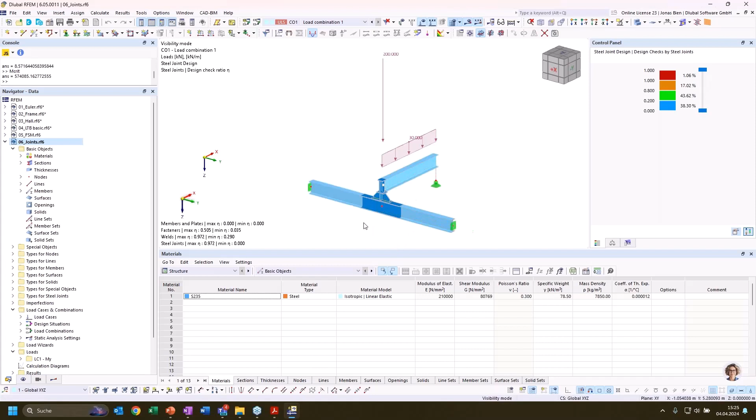I just want to mention as a side note that we also can perform the linear eigenvalue analysis within our steel joints design. To demonstrate this, I have here a relatively easy model where I have a connection between a secondary member to a main member here. And the secondary member is loaded.

I can not only do the usual steel joints design checks, but I can also perform a buckling analysis. And I first want to show you where I can activate it. You can find that in the ultimate configuration for the steel joint, and in the first point, perform buckling analysis.

And if you have activated it, then not only the resistance of the components is calculated, but also linear eigenvalue analysis is performed. And we can assess the results via the table. Here we also see that we don't only have the result values for the stress strain analysis, but also for the buckling analysis.

And now in this table, again, we get the critical load factor for our 4 mode shapes that were calculated by default. And we can also assess the mode shape or analyze the mode shape by clicking on one of those table entries and opening the steel joints deformation or results button.

And now I would see the mode shape for mode shape number 1 in this particular joint. I can browse through the different mode shapes by clicking the different table entries. And I can see that for this particular joint in the first mode shape, I would have some kind of web buckling under the load introduction here from the secondary beam.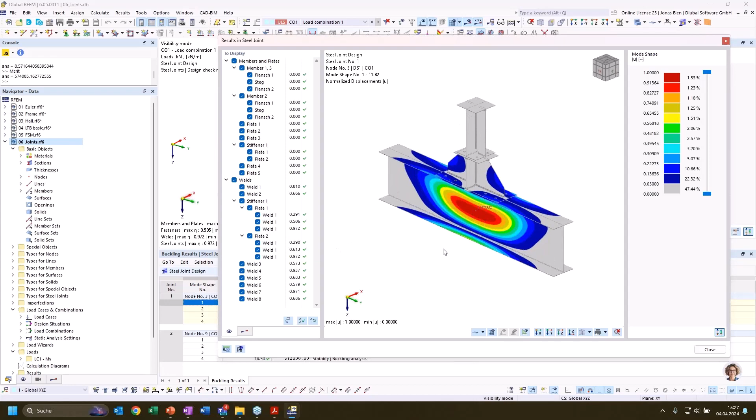I could take some measurements to avoid that, but I also need to take into account the critical load factor in order to judge how critical this mode shape is. We see that for the critical load factor of 11.8, we get this warning sign, which means the critical load factor calculated is lower than the default limit value of 15. But that doesn't necessarily mean we have a problem here.

The default bifurcation factor limit is derived from Eurocode 3 part 1.1, which is more for member design, and this limit of 15 should be conservative for most cases. What I would suggest is to really study the mode shapes we observe here as a result of this buckling analysis, and then see if we can extract limits for this critical load factor from the respective parts of the design codes.

In this case, as I said, we have some kind of web buckling under the concentrated load introduction here. So I would check chapter 6 of Eurocode 3 part 1.5, where web buckling under patch loading is treated, and see if I can derive limit values here.

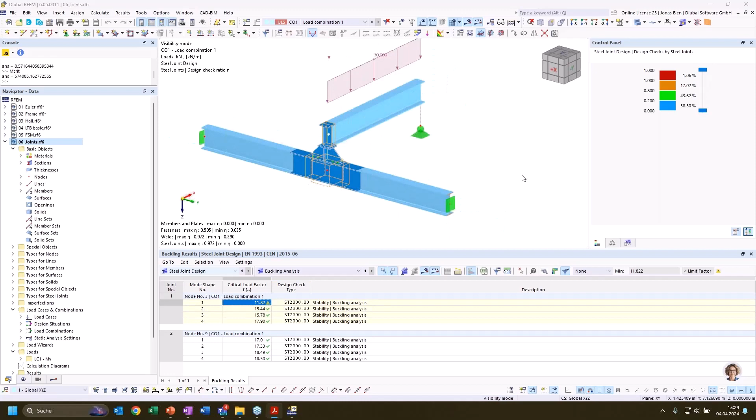If I know the correct limit value and want to improve the behavior, I can directly do that by modifying my joint. I have a second configuration of this specific connection, where I just added a stiffener in the main beam, and we see that the critical load factor for this configuration has already increased from 11.8 to 17 just by adding these stiffeners to the main member web.

If I observe the first mode shape, I see that my buckling panel is now divided by this stiffener. So every change directly affects the results of this buckling analysis.

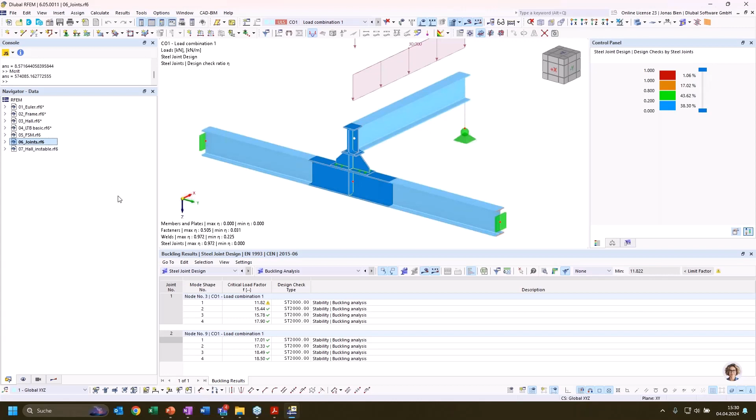Okay, then let's move to the last point. I promised to also show you how we can use the structure stability add-on to troubleshoot when we have some instabilities within our model.

I prepared another industrial hall. It's very similar to the third model, but here I reduced the number of load cases a bit, and I worked with load combinations, and I introduced some mistakes which lead to an unstable solution. So I would have modeled all my structure, put in all my load cases, and now I would like to press calculate and grab a coffee while the computer does the rest of the job.

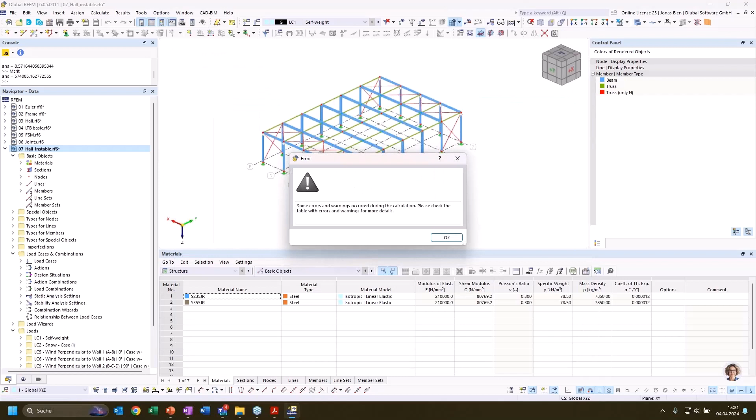But now I already see, when trying to calculate the first load case, which is just the self-weight under first order theory, I get some warning message, and the program highlights that the stiffness matrix is singular. It also gives a hint where I could look for possible mistakes, but I can't really see anything wrong here.

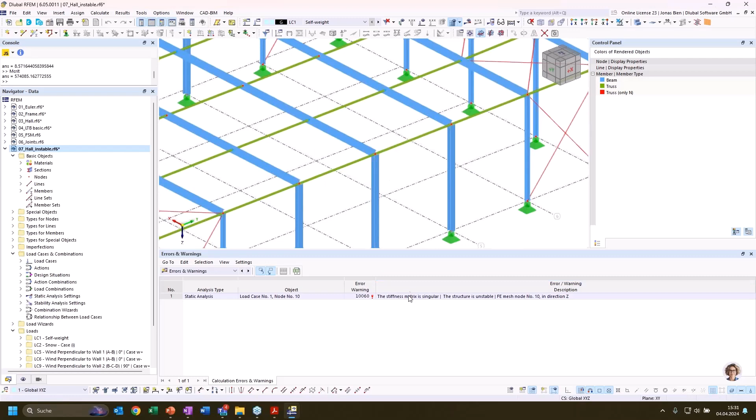I could now activate my structure stability add-on and conduct an eigenvalue analysis with a specific setting. In this case, when I want to check for instabilities, I can say it should calculate eigenvalues without loading for instability checks. So it would look for eigenvalues of 0 value and calculate the respective eigenvectors.

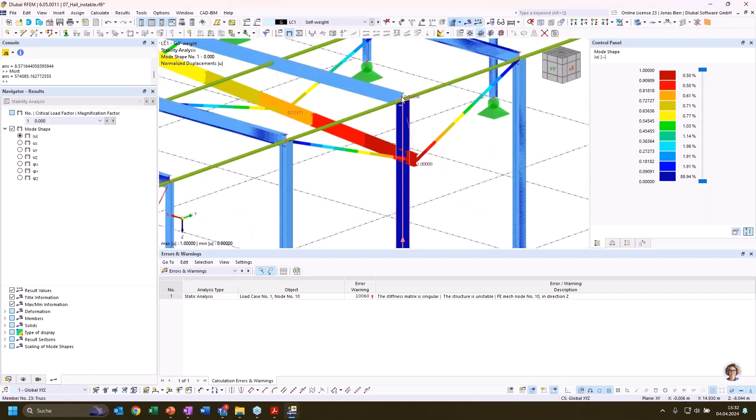What I see now is that it seems like the girder in axis number 4 is more or less falling down. It seems like it's not connected to the beam. When I zoom in here, I see there are 2 separate nodes, and the column is not properly connected to the girder, which could be the reason for my instability.

So I just quickly resolve this issue and now try again to calculate load case number 1. Let's see if it works now. Again, I get an error message, and again I can try to get additional information with my structure stability analysis.

So when I click through the results, deformation results, I see that now for the rotations around the global x-axis, something looks a bit off. I get very, very high deformation values, and it seems like the girder here in the last frame freely rotates, which indicates it's not properly connected to the columns, or some degree of freedom is not restrained properly. If I look into the connection definition, I see that I have a hinge on every column end.

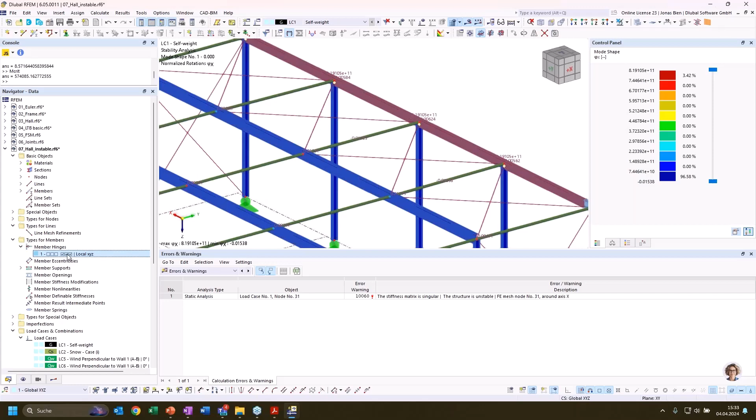I defined this hinge with rotations, setting free all the rotations in all 3 axes, which means this member can freely rotate at the top. Maybe that was a mistake - I wanted to establish frame action here, but I accidentally applied the hinges to all my columns.

Now that I found this mistake, I can remove those hinges in the frame corners, and check a third time if the solution runs or if the simulation works.

And if I haven't done anything wrong, it should work now. Okay, now I get results for this first load case in my static analysis, which means that my model seems to be stable now. And now I want to go to the fullest and calculate all my load cases and load combinations.

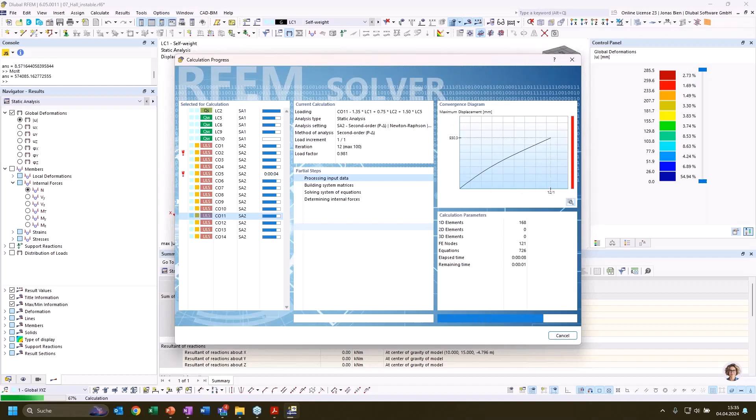That would be the second stage, and it is again not clear that I have no problems with my model, because my load combinations I now solve with second order theory. And I again get, only for some load combinations, errors that my stiffness matrix is singular and my structure is unstable.

So this message can have two reasons. Either I have done something wrong in my modeling, I've connected disconnected parts, or some DOFs are free and not restrained in my model. Or it could mean that my system is really overloaded because I calculated according to second order theory. It could also be that I've reached the critical bifurcation load of my system.

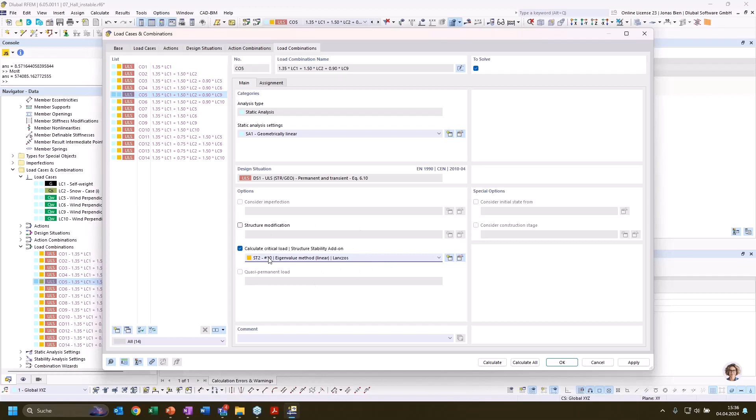In order to check this, I would recommend going to the problematic load combination, for example load combination 5 or 2, and I can just switch to first order theory and perform a linear stability analysis, just a regular one. Now I just use the second setting where I calculate 10 eigenshapes. I could have taken less because I'm only interested in the first mode shape.

Let's go to the results for my load combination 5. What I can see now is that my critical load factor is below 1, and that indicates that my structure is indeed unstable because it is overloaded. I can also check what could be the issue based on the mode shape.

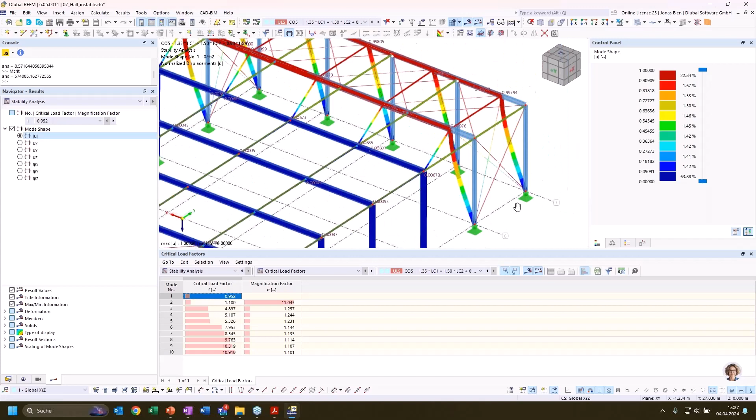If I now look closely, I see that in my second frame, I set the wrong columns. I used the columns from the end frames, which are much too weak for these internal frames. But this can also be quickly resolved by just copying and overwriting the member dimensions with the columns from frame number 3 or 5.

And if we now again perform the same simulation on our load combination 5, we will hopefully be able to get a suitable solution and a stable model. And now we can see, okay, with our first mode shape, our critical load factor is above 1, and our model is good to go. We have good chances that we can properly design the members within our structure.